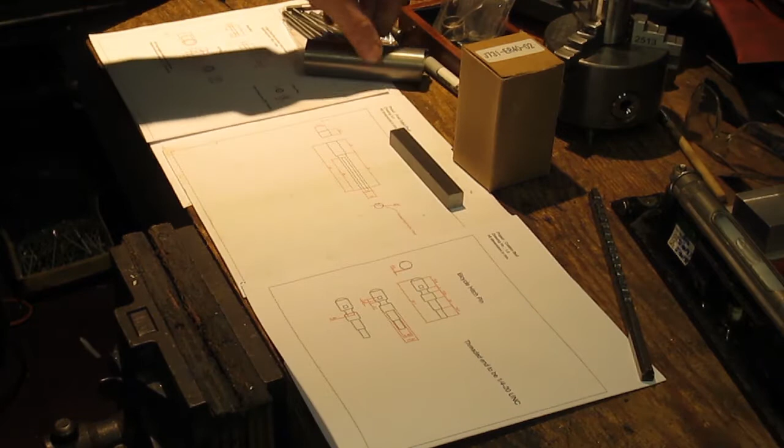Okay, well as you can see, I've got three projects here. This is one I've already started - some titanium rods threaded M6 by 1 each end, and I've also had a 30mm piece of titanium grade 5 come in for some oil plugs and a couple other bits and pieces. So we'll get on with that.

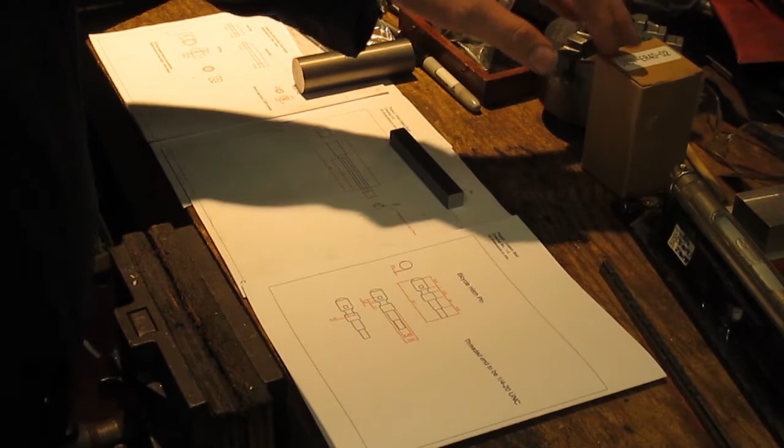Unfortunately, as I said, we need to broach a new 45 tooth back gear, which I cracked - that's for the lathe, and that's what this is still in the chuck for. I'm hoping I can dial that back in, but I was cutting a 22 by 1.5mm thread and unfortunately that broke. We'll get onto that in a bit.

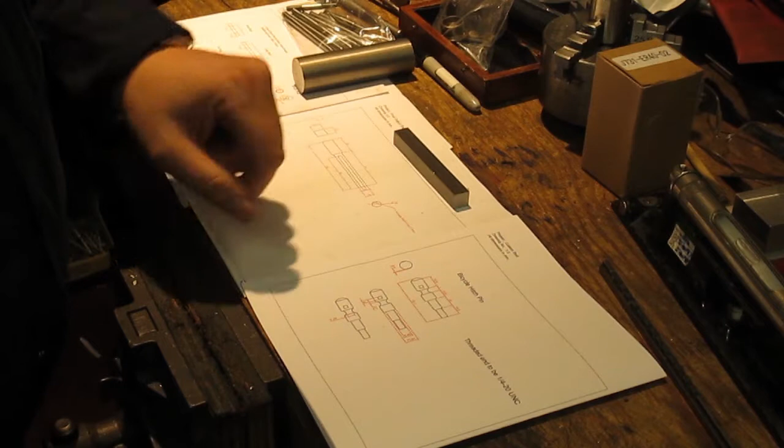We've got an output shaft here, a square to round output shaft I need to get done, and a bicycle hitch pin that someone sent for me to make. We'll get that done as these jobs progress through. So as I say, I've got some new tools.

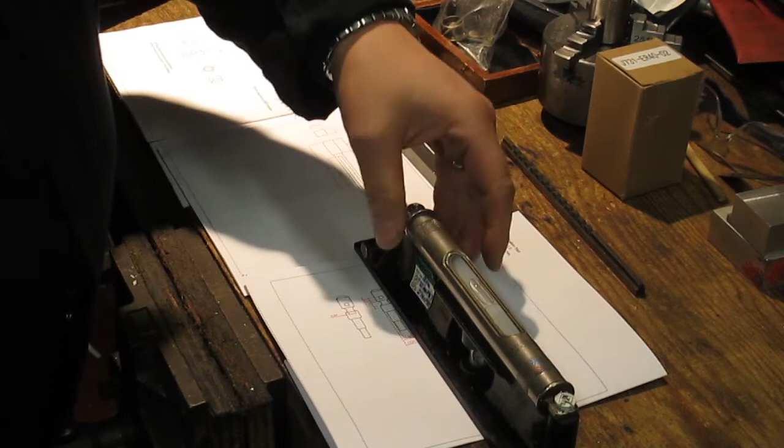So we've got a nice 12-inch engineering level here, this is a Moore and Wright. It's out of calibration, but I think for what I do it's going to be an absolute boon to have, not only for setting things back up, but just to check level on the milling machine and on the lathe, obviously.

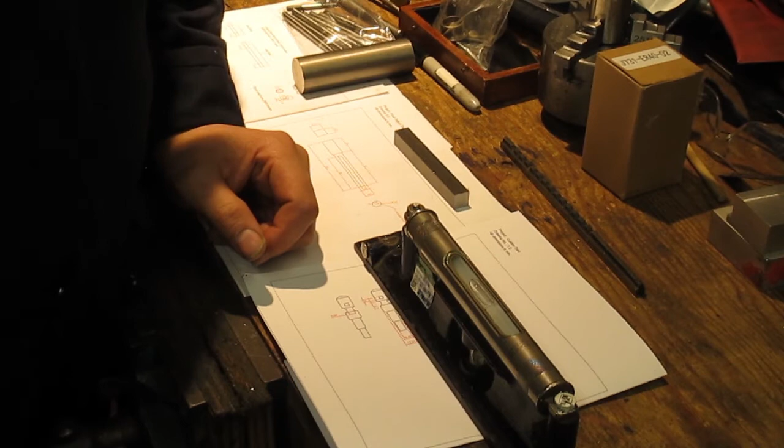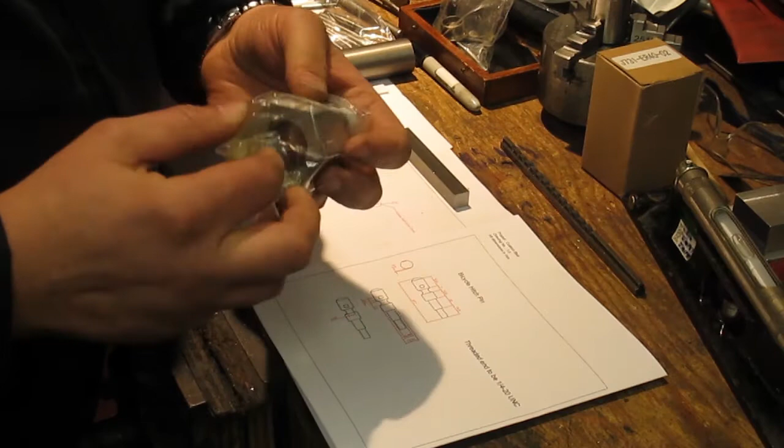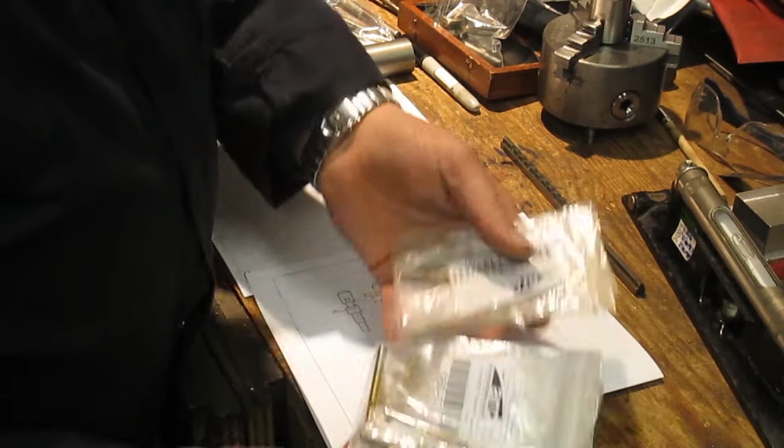With that, I've actually decided to buy some - when I got that through, I recently purchased some ER40 collet blocks. I've got a hex block there and a square one there, and I've also got my first ER40 collet, 22mm, for these oil plugs I'm going to make at a later date. Along with those came some drill bits and pieces for that project, some tips, a 6mm reamer for different bits and pieces.

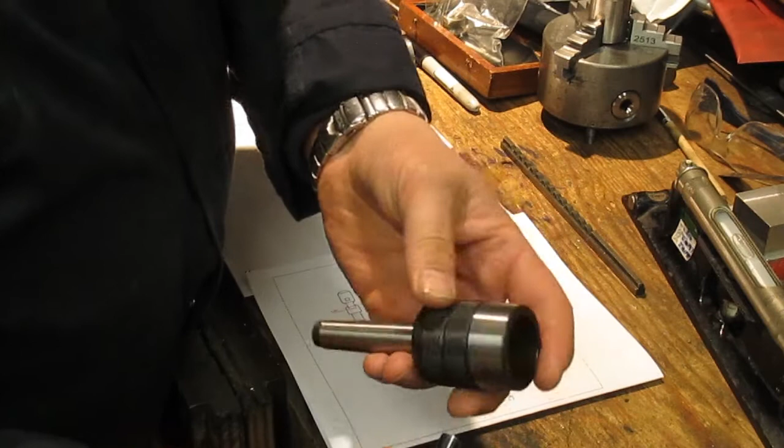In one of the packages I've got today, I actually want to repair this revolving centre - the bearings on this were shot, this was all over the place. So I've got some high-end bearings to go into this. Hopefully that will make that a nice cheap repair for me.

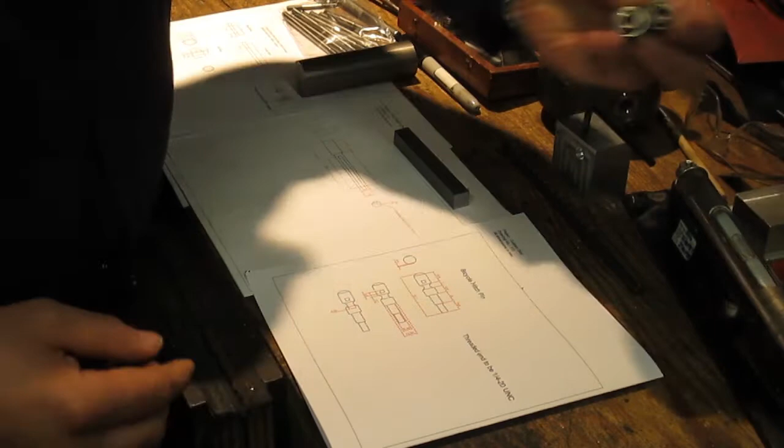As you can mostly see around the bench, there are a few other things. I'm looking to run some airlines, so I've got quarter BSP to 8mm nylon line connectors. At some point we'll be making a manifold, so hopefully I'm going to video that as well to get that done.

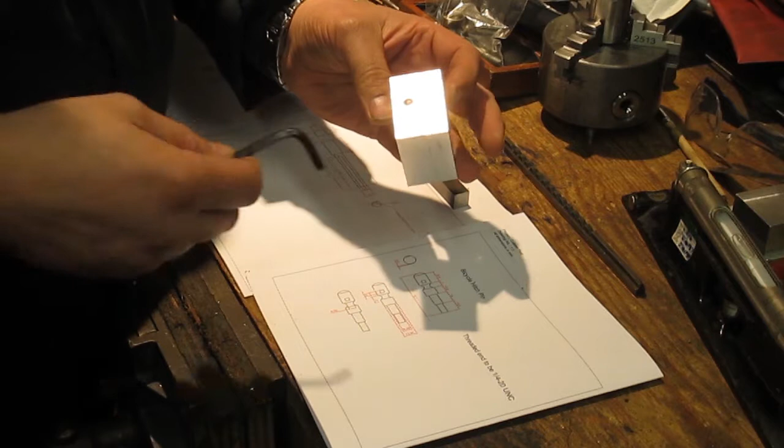Once I've got that, it'll be great, because at the moment I've been playing with the idea of broaching internal hexes. This is just aluminium, but as we can see we've got a 5mm hex there. I'm looking to perfect that process on the mill, and then we can expand that to do bigger hexes, and so on and so forth.

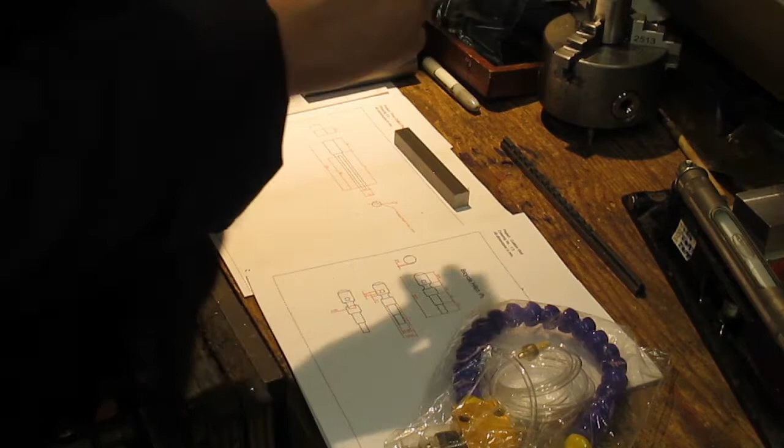Things that came in today were a nice cheap and cheerful misting cooling system - that's another project there. This is the actual gears that I bought, so that's the one we have.

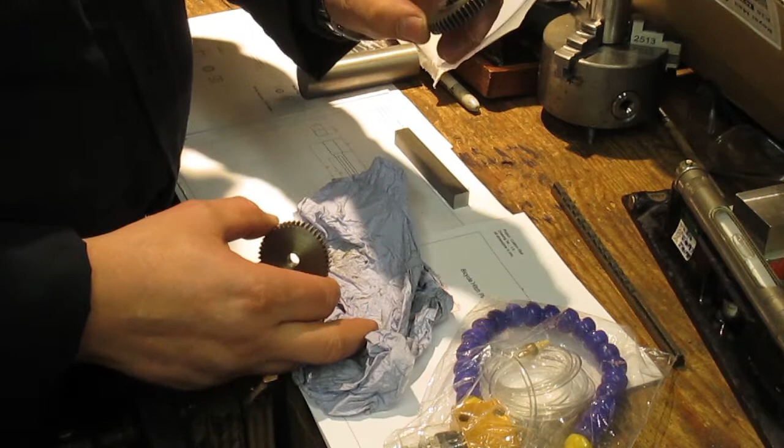I need to make a bushing for this, so we're going to measure that up and I'll make a bushing for it. The second part of that will be boring this out to size and broaching the keyway. I'm lucky enough to have been lent this - I don't actually have any keyway broaches, but I've been lent that. As you can see, the teeth have been shattered in a couple of places. Not sure why that happened - I haven't really used the 1.5 that much, but maybe it was just a fault in the casting.

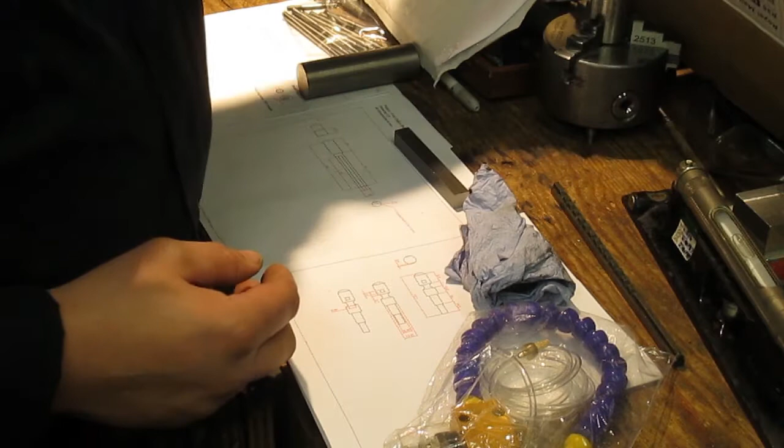We've also got, as I say, the bearings. So we've got the 3 bearings there, which will go into the revolving centre.

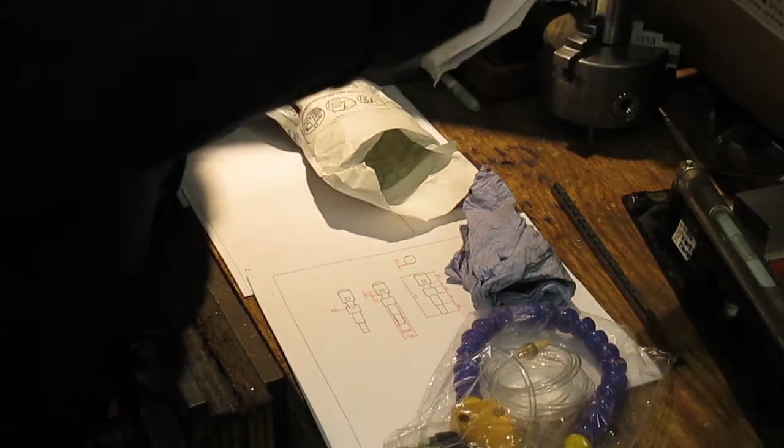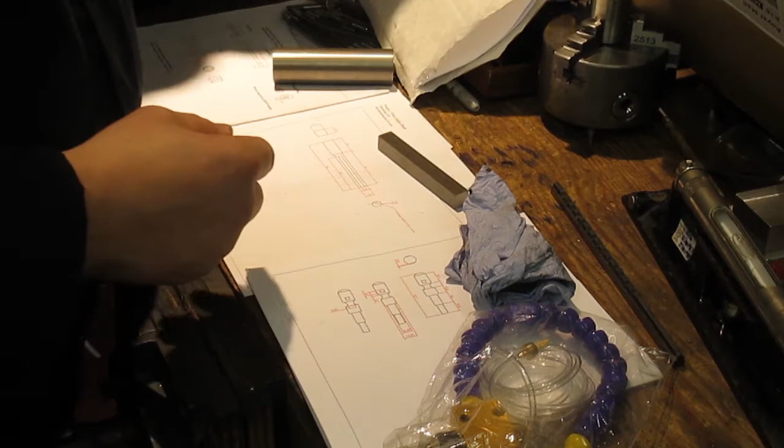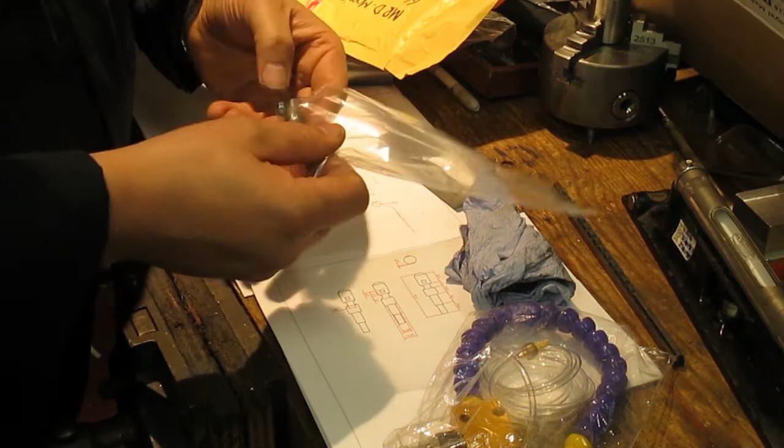And then I bought some new threading tips and inserts specifically to run with the titanium. They do a better job on that, so we'll be trying them out in the future, along with some soluble cutting fluid I've got there. The last one is this little hitch pin project that was sent to me, so I've just copied that out and drawn it, and we'll get that done over the next couple of weeks, hopefully if not sooner, and send that out.

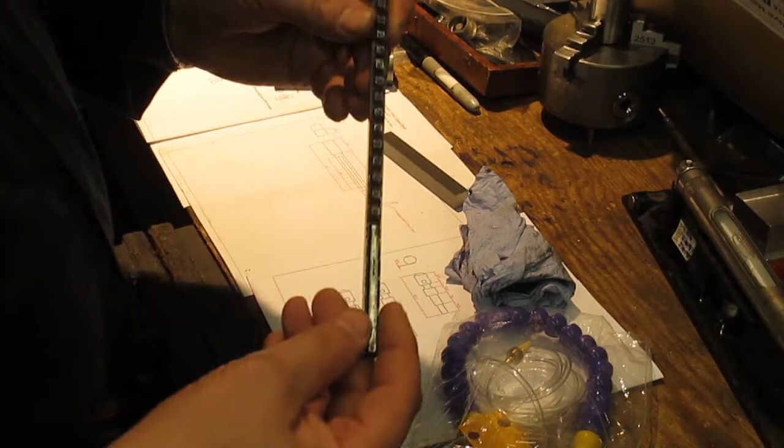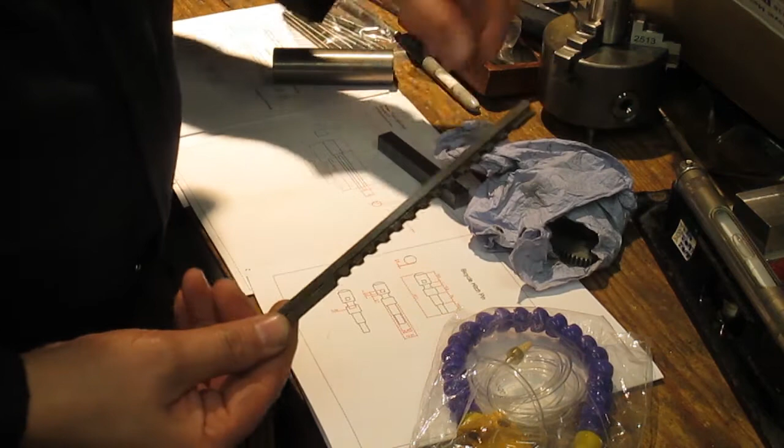So as I say, we're making a bush for this broach, so we're just going to chuck some material in the lathe. I haven't got anything specifically for this, no dimensions as such, I'm just going to do it as we go along. So let's crack on, I'll get a piece in the lathe, and then we'll get to machining.

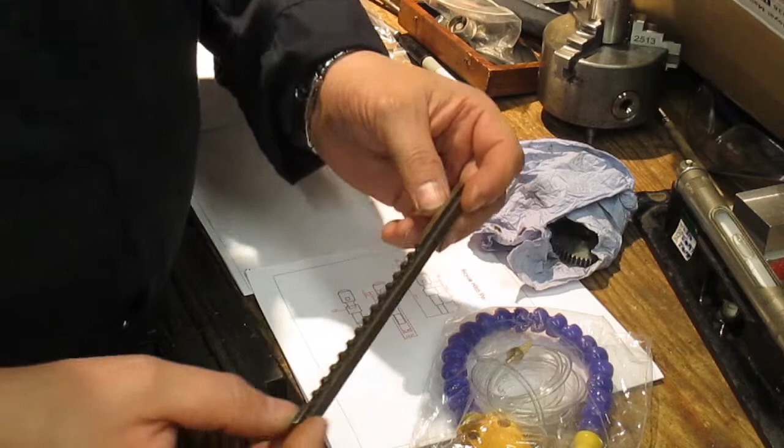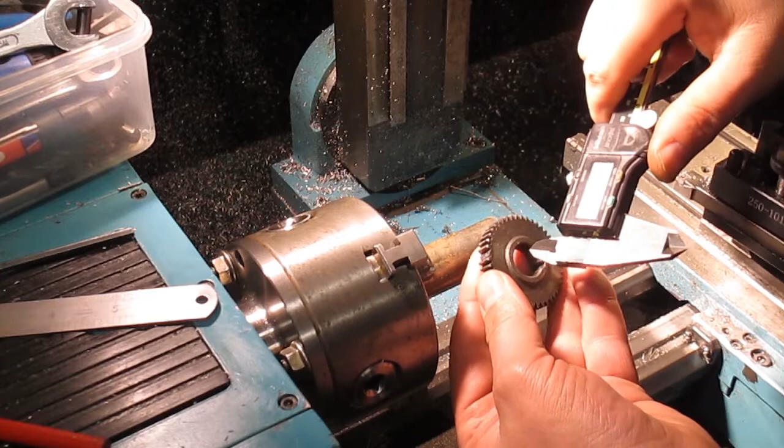Okay, well as you can see, we've mounted a bit of mild steel stock in the lathe, and I've just faced this off before turning the camera on. So we need this bush to fit the internal size of this when it's bored out.

So this is 16.08 according to that, so we're going to aim for a 16mm bush. Then what we'll do, eventually in part 2, is bore this new back gear out to suit 16mm, and then we'll obviously broach the 4mm keyway.

Okay, so let's get this turned down to 16mm. I've just put a couple of marks on here, roughly 35 and 40mm or thereabouts in length. I don't think it needs to be much longer than that - it gives us a good length to keep it nice and straight in there, and keep the broach straight. But we'll turn down to those dimensions and go from there. So let's crack on.

This is the final cut, so this will take it down to just under, about 0.01 to 0.02 under 16mm. We'll get this cut and chamfer the ends, and we'll do a test fit with the old back gear.

Okay, well just give that a quick polish up, and that now slips on there nice, which is good. So what I'm going to do is spin this around, part the rest off, and then I'll bring you back when we're in the mill, ready to cut the slot that holds the actual broach, so we can do this keyway. Okay, I'll bring you back then.

Okay, well as you can see, we've got the bush mounted in the vise. I still don't have any parallels, still looking out for them, still trying to buy some. So what I use, I've got some half inch tool steel, so I'll just build that up until it gets to the required height where I'm happy with it.

So what I've got here is an electronic edge finder essentially. Once it makes contact, a little red light shines. So we just get this to one side, and then we'll zero out the DRO and use the half function.

So we're there, so I'll zero the DRO on the y-axis. What I do is I tend to come off and then just go back on, and zero again, and then we'll go to the other side, and wait for the light. So we're there, 10.8, just come off of that, and back on.

Okay, and we'll use the half function, half Y, and then we'll just take that back to 0.

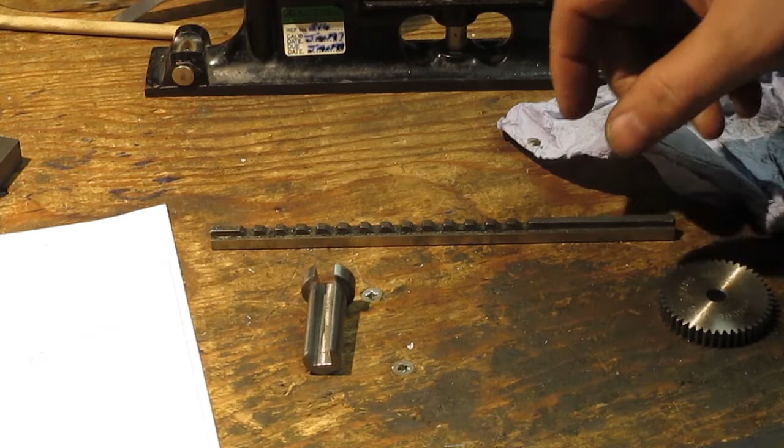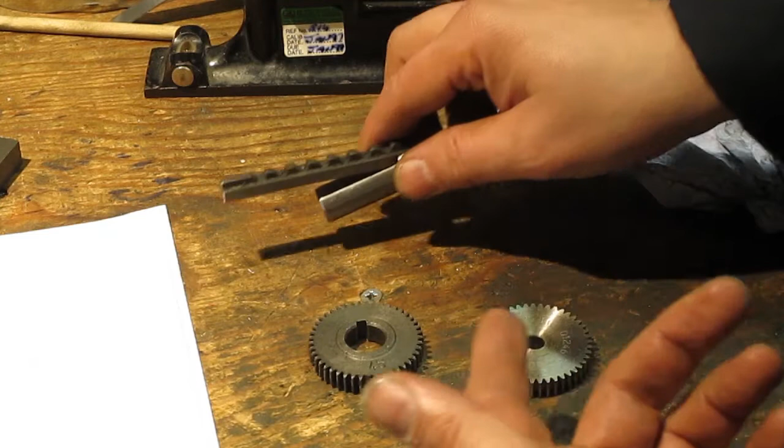Okay, well as you can see, we're back at the bench. It's a nice fit, the fitment into that old back gear is nice. So what I'm going to do is, I've only got one of these, I'm going to take another piece of mild steel just out of the scrap bin, bore a 16mm hole within it, and not too much thicker than that, whatever I can find. Put this in and then broach the keyway in there to ensure that what I've done is correct and my thought process is correct.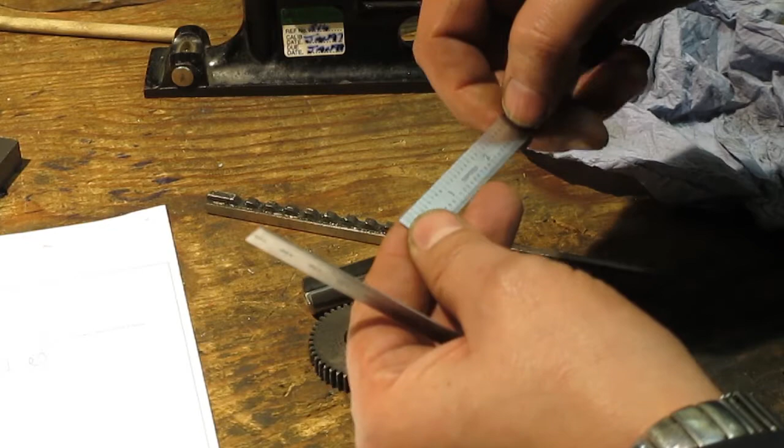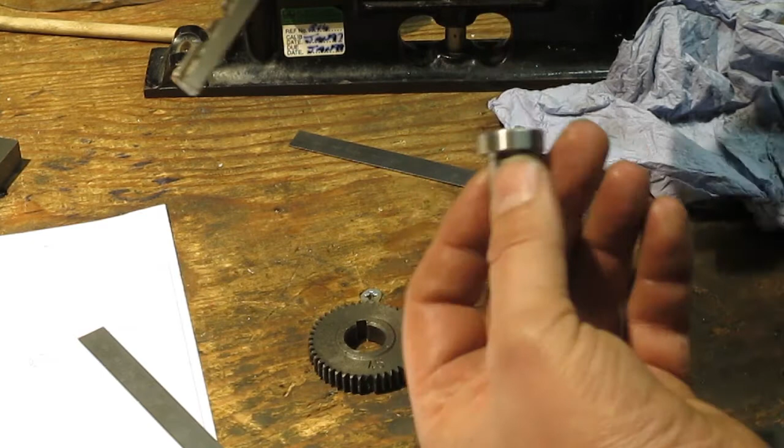So for my shims, I've actually got the shims that come with it. I was lent this by a local engineering company, very gracious of them. But what I have got are some old rulers here. Now these are 0.5mm in thickness. So what I'm going to do is trim these down, cut them in half, trim them down, and then just bend them over, and then they'll sit basically in the back behind the broach, and that can be stepped out to take up the gap to hopefully then cut a 2mm keyway to match the one that's there.

But as I say, I'll do that on a separate piece of material, and that will be in the next video. So yeah, we've got a little ways to go on that, and a few more bits and pieces there, but hopefully when we do this broaching for the first time, it will be correct once we've done a trial piece, and that will be in the next video.